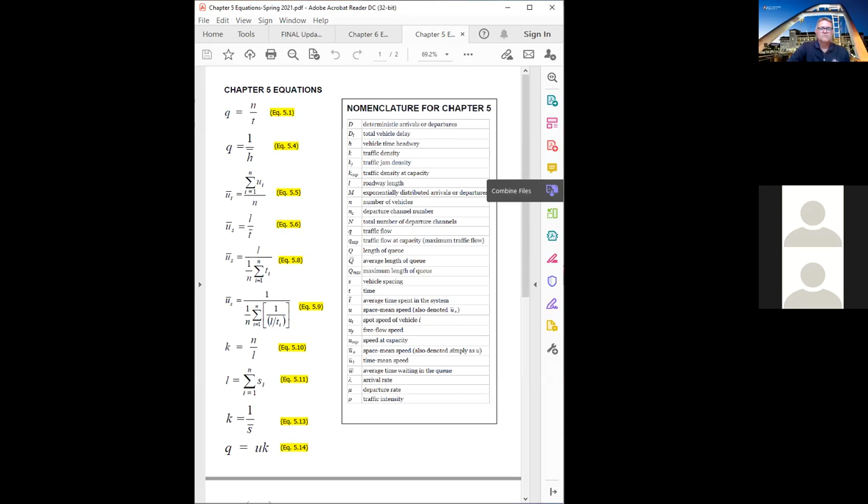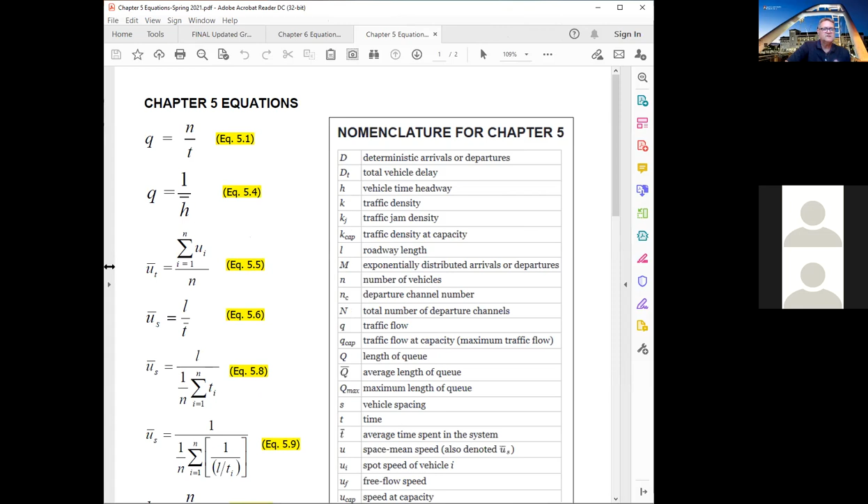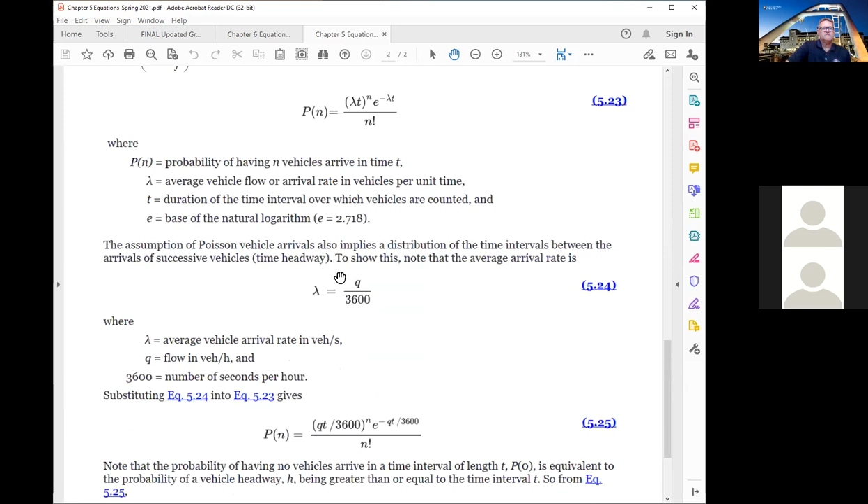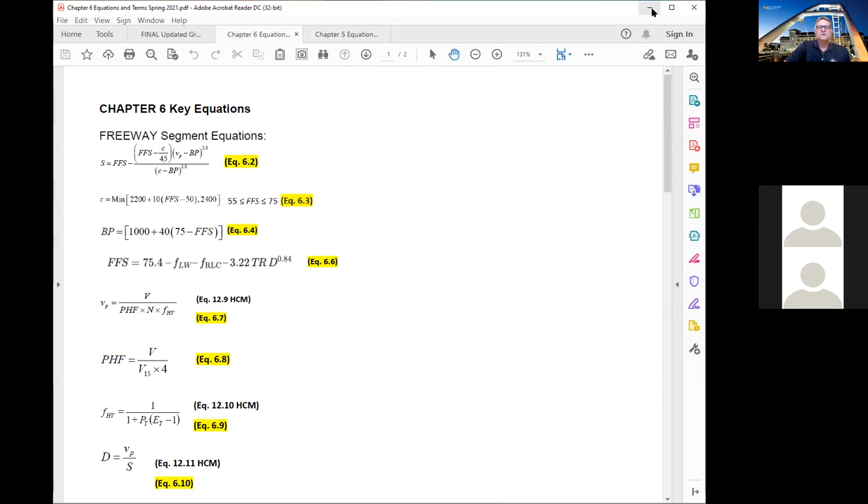You all should be seeing the PDF of the chapter 5 equations, and the nomenclature for chapter 5. I've been showing this as I've been going through chapter 5 there. It actually covers a couple of pages of information from chapter 5. Then I've also got the same thing for chapter 6, the key equations and the nomenclature. I just wanted you all to know that these pages will be provided with the midterm exam as attachments, so you'll have those available. Just wanted to make sure you knew that.

So now I'll go back to the slides. There we go. Okay. So going back to starting with chapter 5, obviously, I don't work backwards. I'll start with chapter 5.

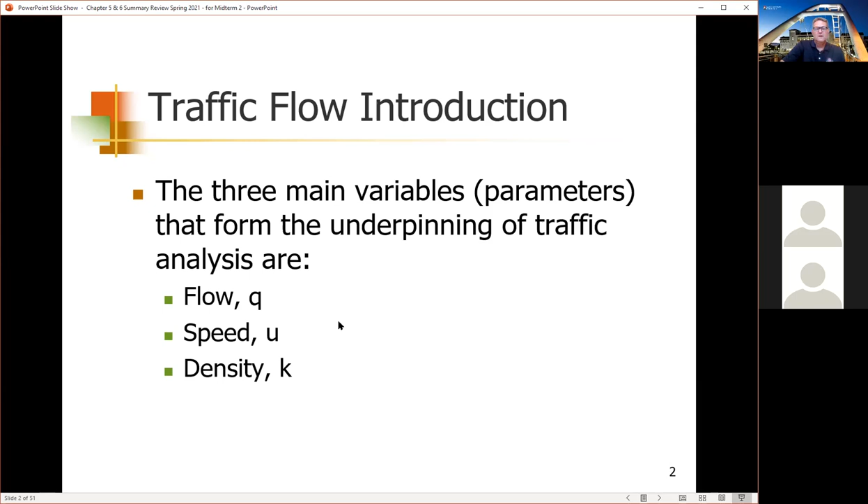If you recall, chapter 5 was quite a bit about these three variables or parameters: Q, U, and K, flow, speed, and density. Those terms and variables are important to understand the concepts in chapter 5. To get into some of the definitions, flow is defined as the number of vehicles passing a designated road point during a given time interval. So that's typically vehicles per hour, a very typical way to define traffic flow.

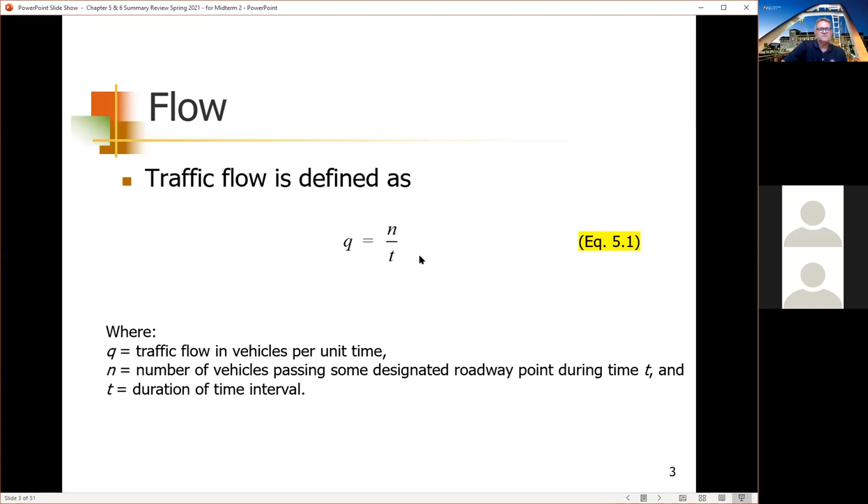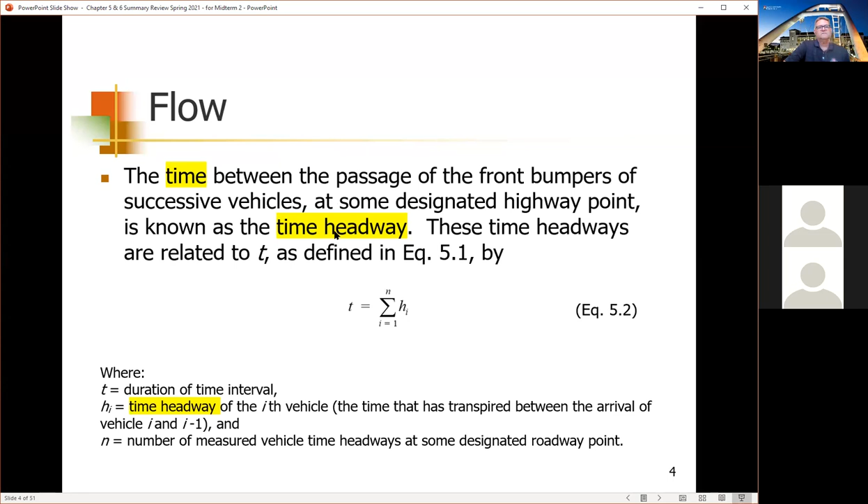And then I put in this slide, not so much for the flow, but just to remind everyone the concept of headway. Headway is a concept of time, not distance - spacing is the measure of distance. That's why I have it highlighted here, that headway is sometimes even referred to as time headway, just to emphasize the fact that headway refers to a measure of time.

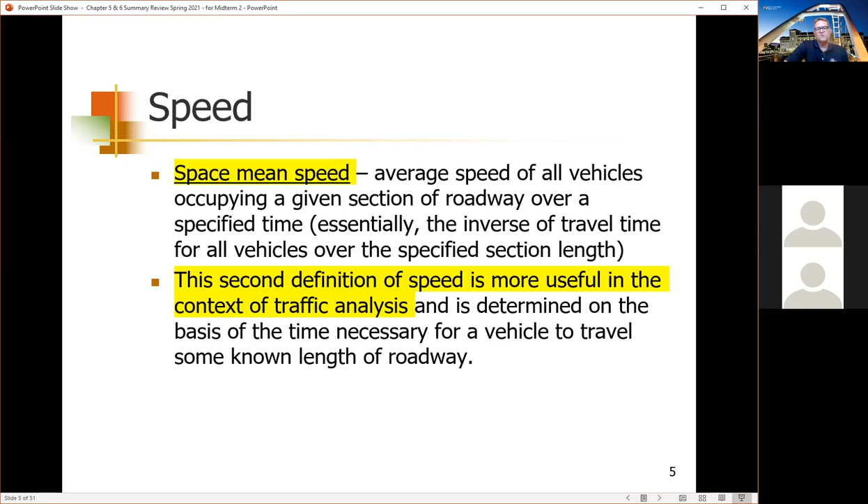So I just want you to be sure that you understand the difference between spacing and headway, because I think sometimes people think - at least in my mind, when I hear the word headway, I kind of think of it as a distance as opposed to a time headway. So, for me anyway.

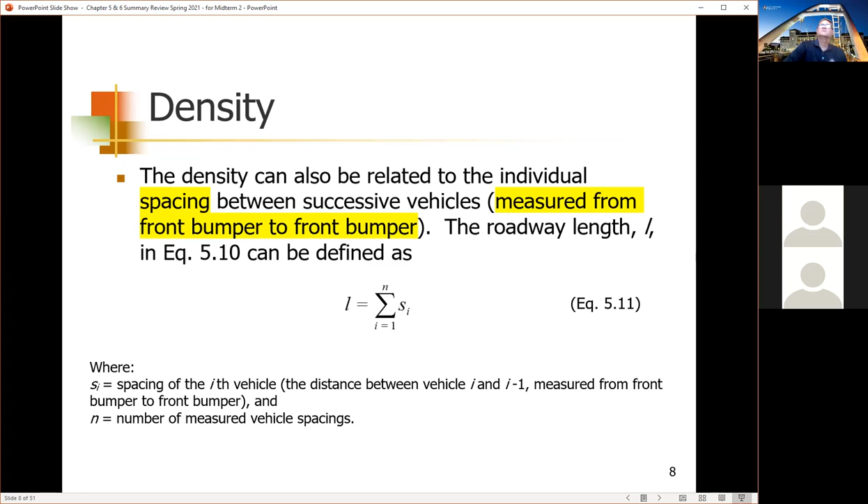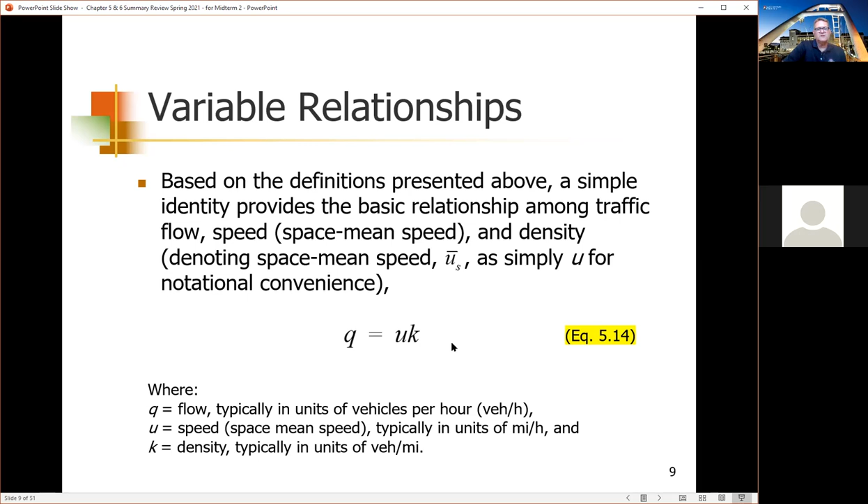This relationship here will be on the list of equations attached to your exam, but I think it's important to understand that flow Q is equal to speed multiplied by density. The units are vehicles per hour for flow, miles per hour for speed, and vehicles per mile for density. So you keep all these units consistent. This is one of the most basic relationships that we went over in chapter 5, and as you can see, we've got flow, speed, and density in the relationship.

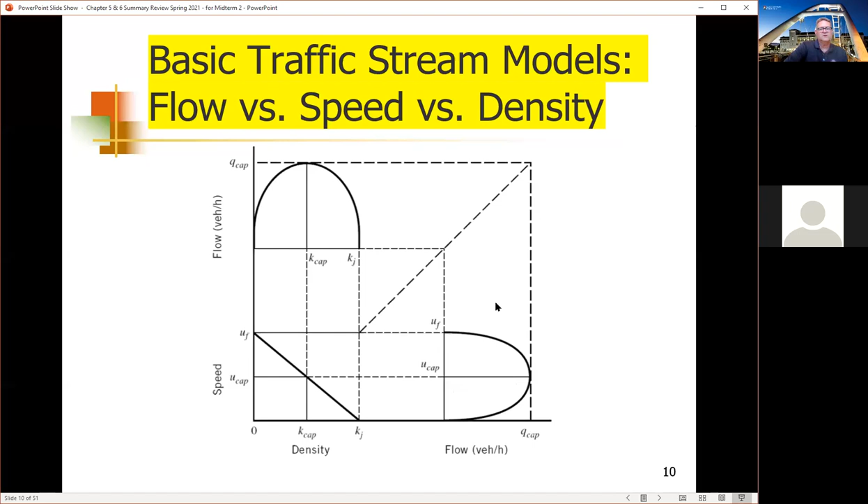I highlighted this figure so that you understand it shows the relationship between speed and density, which is linear down here, the relationship between flow and density up here, which is curvilinear, and the relationship between speed and flow over here. So the relationships that flow has with speed and density are both curvilinear, whereas the relationship between speed and density is linear. I think it's important to understand and be familiar with the relationships shown in this graph.

So then in chapter 5, we moved on to distribution as it applies to - there were some examples we went over that are non-traffic examples, but we wanted to emphasize the distribution of arrivals and departures of vehicles as being important to understanding traffic analysis. One of the variable distribution relationships that we used was the Poisson distribution.

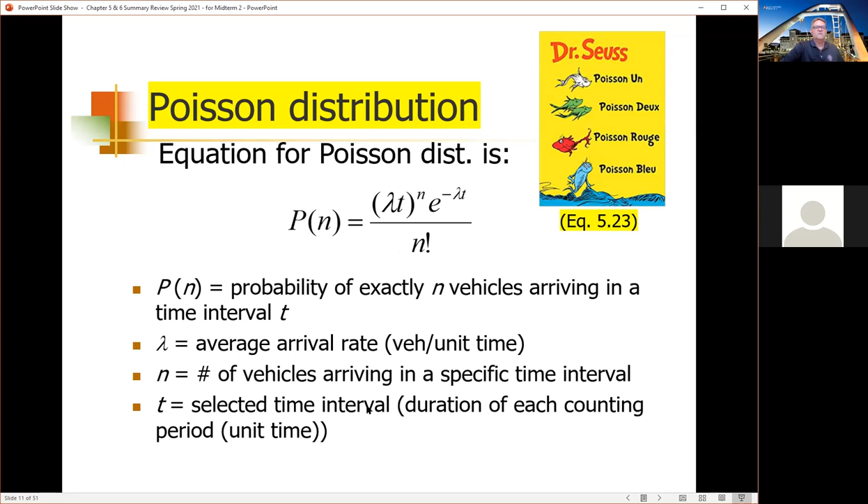Again, the equation will be attached to the exam to the extent that you may use it to solve a problem, but it's important for you to understand that Poisson distribution is a way to predict a random distribution of vehicles, in our case. Then we also went over a concept called the negative exponential.

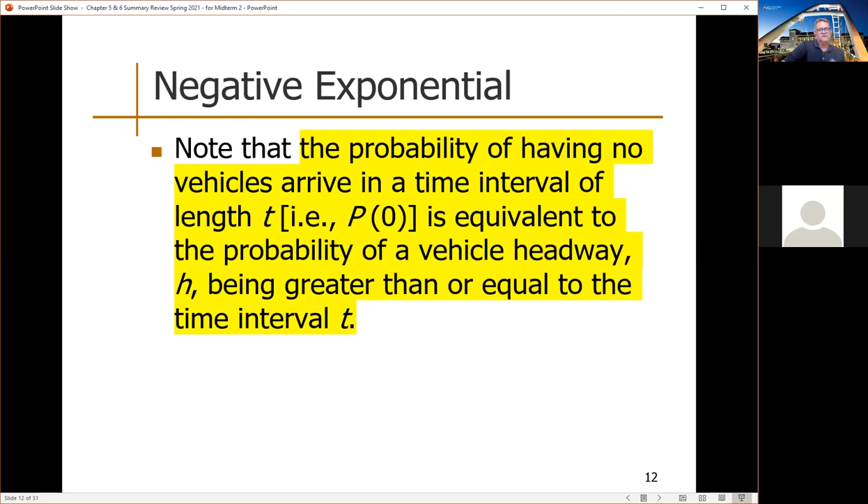I know we had homework problems on both the Poisson distribution and negative exponential. I think it's important to understand that the negative exponential is kind of a specific case where you're predicting the probability of having no vehicles arrive in a time interval t, which means it's the same as the probability of the headway being greater than or equal to that particular time interval. So it's a useful tool in being able to calculate various probabilities, as we did in the problems we worked on.

So I think that's a concept that's worth paying attention to and taking a look at, and look at the problems that we worked both in class and in your homework on that. Then there's the queuing model components.

Those include the arrival pattern, the service and/or departure pattern, the number of departure channels, and the queue discipline. The queue discipline refers to first in first out, last in first out, that kind of thing. The number of departure channels obviously just means, if you only have one departure channel...

You're likely to be restricted, and queues may very well form unless the arrival pattern is so infrequent that one departure channel works. Sometimes that does, but sometimes it doesn't.

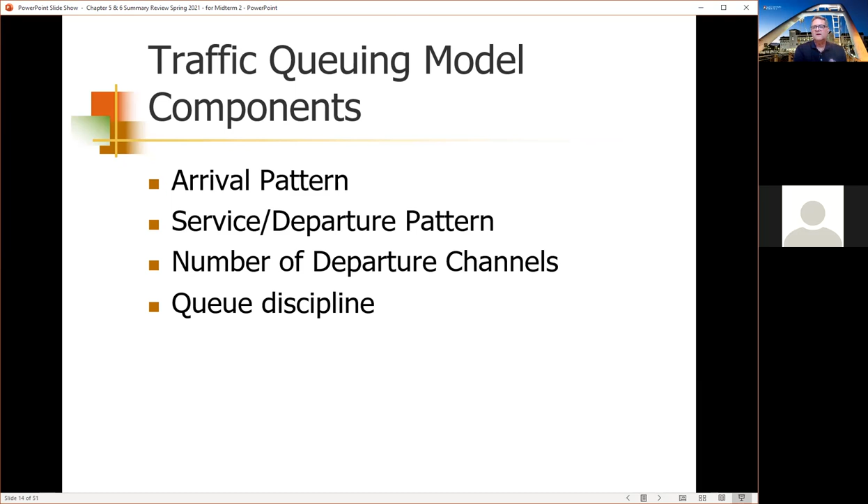Recall, we did some problems where we had a situation where there was arrivals, there was like a bottleneck, right, where departures were restricted and yet arrivals kept coming, that kind of thing. And so that's where this comes from here.

For both arrivals and departures with one departure channel. We did do a little bit in some of the exponential or stochastic ones as well.

But if there's going to be a problem on the exam in this queuing area, it's going to be a D-D-1 type problem, which is very similar to the example problem we did in class, 5.7. Can't remember the number of the homework problem, but I think there was a homework problem that was pretty much in line with these queuing problems.

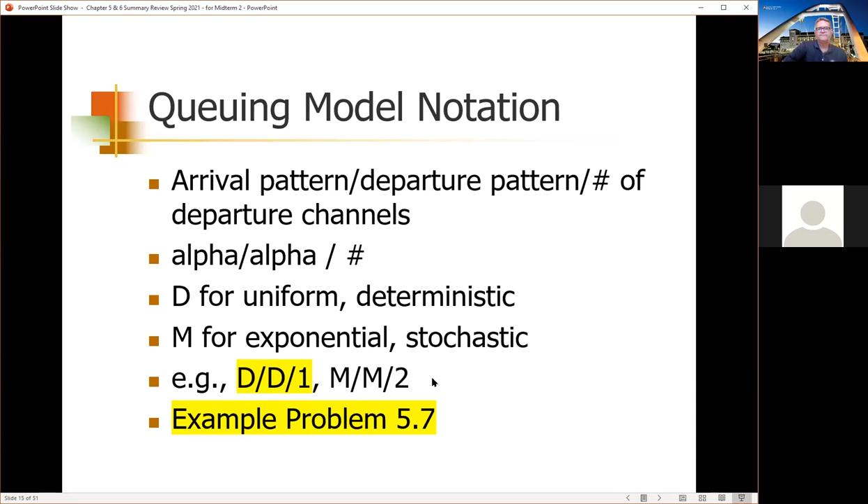Yeah, here's the example. This is example 5.7 from your book. I'm not going to go through the entire problem and calculation here, but just to remind you that this is a good one to review.

But basically, this is a typical kind of problem. Vehicles arrive at a recreational park. There's a single gate where everyone has to stop, and then the attendant distributes the brochure, which takes time for each vehicle. So the park opens at 8, at which time vehicles begin to arrive, and they give you the rate.

Which in this case, this is a deterministic rate. They're saying it's 480 vehicles per hour. After 20 minutes, the arrival flow rate declines to 120, and then it continues at that level for the remainder of the day.

So they're obviously making a very generalized assumption here that you're going to have this arrival rate of 120 vehicles per hour go all day long. It probably doesn't, but that's a good approximation, and maybe they have a pretty steady flow of vehicles, so it's okay to use a deterministic arrival rate.

But the issue here is that you get a big slug of folks that line up right when the park's going to open, trying to get in early, and they still have to go through that same kind of knothole. And so then they tell you that it takes 15 seconds to distribute the thing.

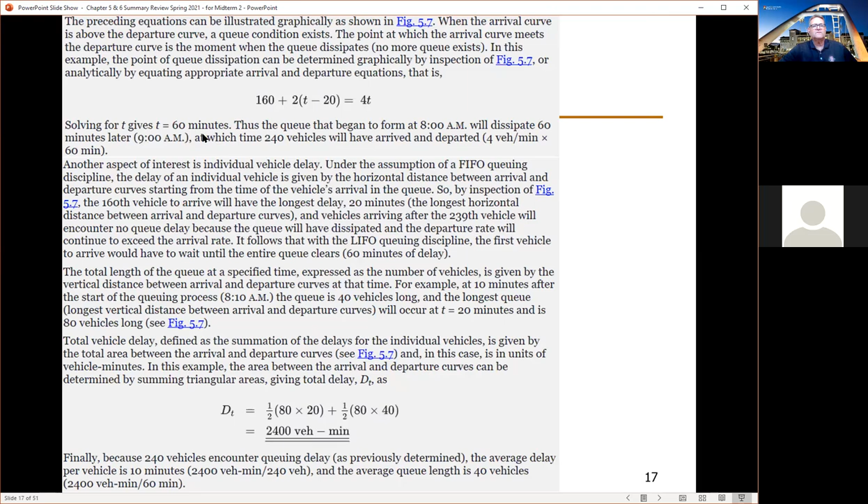You could do it graphically and determine that it takes 60 minutes for the queue to dissipate, or you can solve it by setting the arrival rate equal to the departure rate and solving for t, giving you t equals 60 minutes. So hopefully that helps you understand how you start at the starting point, figure out how many vehicles arrive in a certain period of time, get your two points since it's linear, and connect them — doing that for both arrivals and departures.

We've had some problems where there's a delay of, say, 15 minutes before vehicles are let in. That means arrivals start right at 0 and start going up, but departures don't start until 15 minutes — it's still 0, and then you put the line in, just as an example.

Okay, any other questions on those queuing problems? As I said, we did do a couple of problems with curvilinear functions associated with them, and did some mild calculus to calculate the area between the arrival and departure curves. But on the exam, I'm not going to go there. I think if there's a problem like this on the exam, it's going to be more linear, like these ones — deterministic and linear.

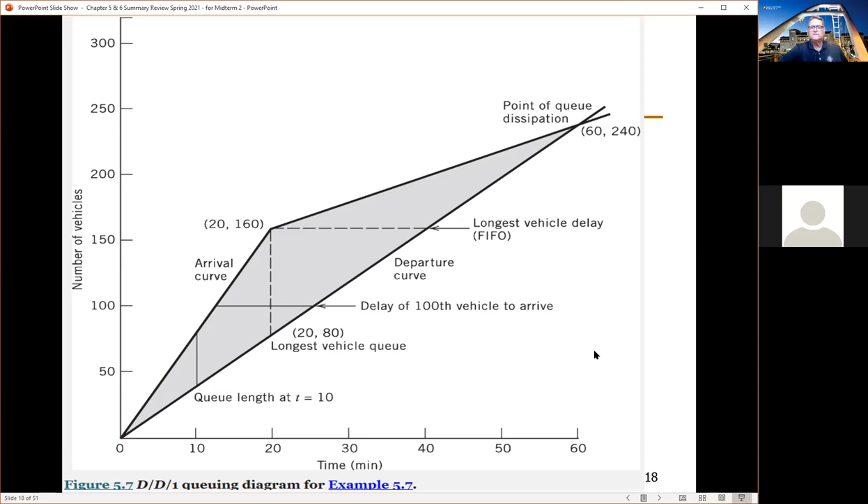So I'm headed to chapter 6. I think chapter 6 is a pretty important chapter. I mentioned this before, it goes right to the basics of traffic analysis in terms of the capacity that freeways and highways have. There's a few concepts on this introduction slide that I think are important to remember or keep in mind for the exam next week.

A freeway is a divided highway with full control of access. Access control means that nobody can cut a driveway directly into the freeway in order to get in and out. You can't demand that a driveway be put right onto a freeway that goes right into their line for food. They can't do that, but they can on a local street. How would you get into the In-N-Out if you didn't have a driveway access off of a local city street? But you can't do that on a freeway.

It's access controlled. So freeways theoretically provide uninterrupted flow, if they're not overly congested, there's not a major accident or that sort of thing. Generally, freeways provide uninterrupted flow. There's no stop signs, there's no signals to stop traffic. Traffic is only stopped in unusual circumstances, or I guess some people might say if a road gets congested at a certain time every single day, that's not really unusual. I get that, but that's why I say it's theoretically uninterrupted flow there.

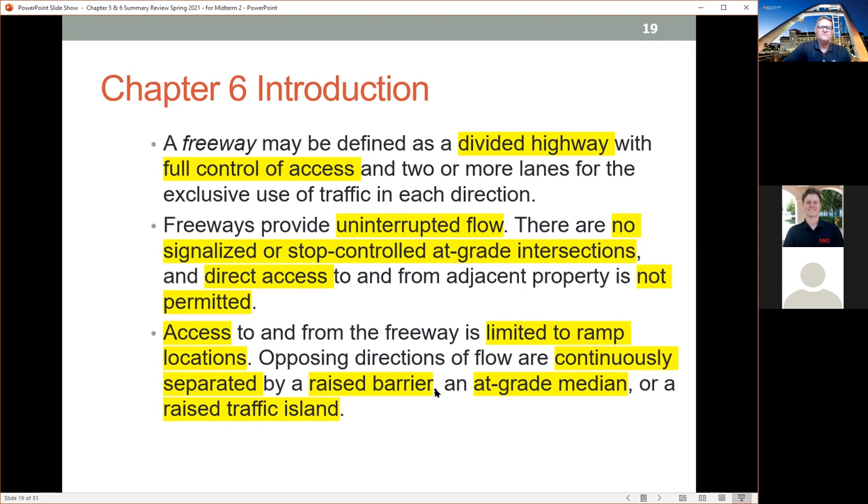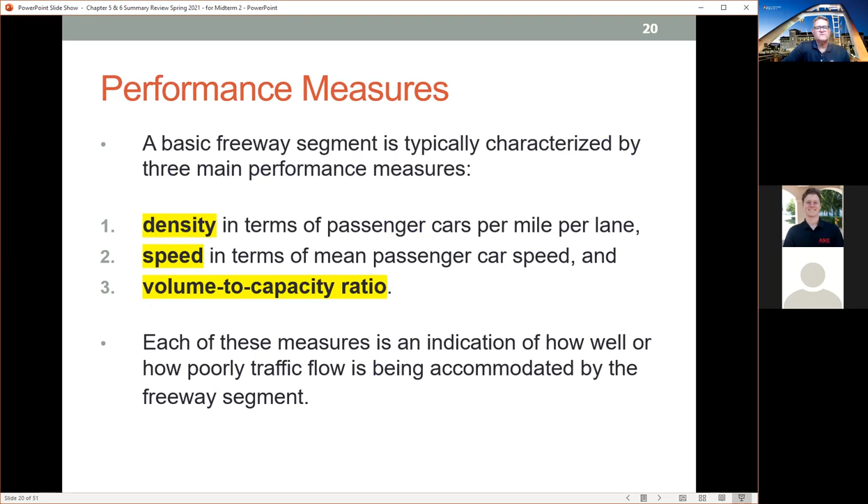Okay, and the performance measures - these are important for chapter 6 - the freeway segments' performance is defined by 3 things: density, speed, and the volume to capacity ratio. We didn't spend a whole lot of time calculating the volume to capacity ratio, but that's kind of what, in a sense, level of service is. But density and speed we focused a lot on in our problems. Anyway, these are things that measure or give an indication of how well or how poorly traffic flow is accommodated on a freeway segment.

So this is in section 6.2, the concept of level of service. Density is the performance measure used to define level of service, and you can see a density of less than or equal to 11 passenger cars per mile per lane is level of service A, which is basically free flow. But if your density exceeds 45 passenger cars per mile per lane, that's level of service F, and that's where you're basically in stop and go congested.

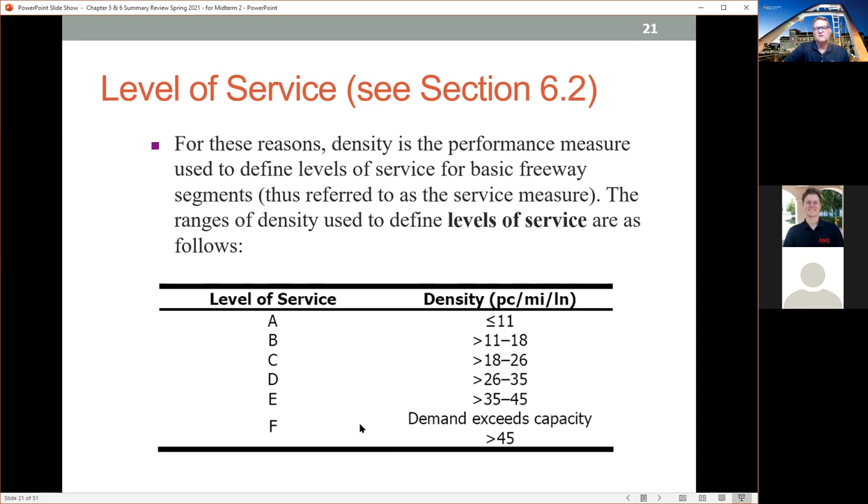Into the congested range. I highlighted this just so you understand that level of service A is free flow. Level of service B is basically free flow, but just a few more cars. Level of service C, again, very high performance generally, but level of service D starts getting - there's enough vehicles that maybe some drivers might slow down a little bit and might feel a little bit cramped. Level of service E is definitely on the edge - it doesn't take much for level of service E to break down into level of service F, which is stop and go, because somebody drops a paper bag out of the window and somebody hits their brakes, and it has a chain reaction. So level of service E is kind of on the edge, level of service F is stop and go, and level of service A is free flow, with B, C, and D being various levels in between.

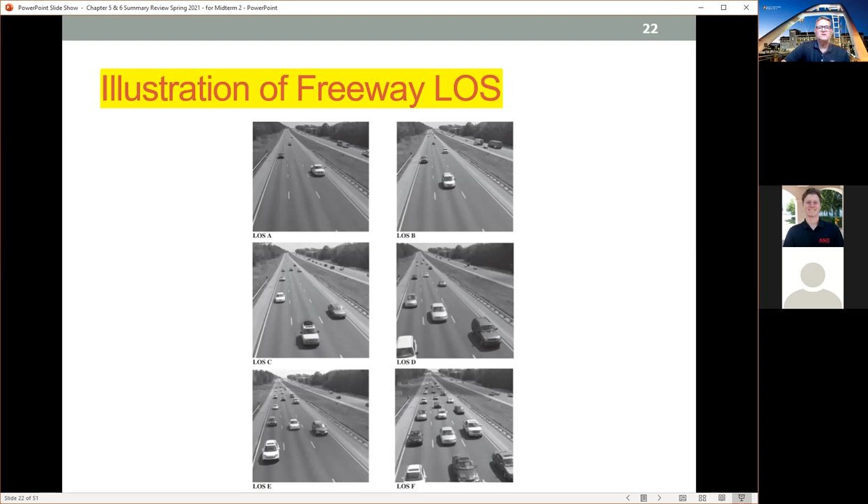So that leads us to the key equations that we used in order to define the speed and flow relationships for freeways. Remember, we're talking about freeways first, then we'll switch to multi-lane highways, and we'll do a really short amount on 2-lane highways.

Basically the speed equals the free flow speed in the density calculation if your flow rate is less than or equal to the break point. The break point refers to where these lines come out here and break off and go curvilinear.

And it changes on freeways. The lower the speed, the further out the break point is - you can see that here. Whereas for multi-lane highways, the break point is all at the same place, and we'll go over that when we get there.

But if you have a flow rate that is higher than the break point, but less than or equal to capacity - and you can't be over capacity, you can't have a flow rate over capacity - then you need to use equation 6.2. It's not a particularly complex equation, but it just takes a little time to make sure you get all the right values put in here.

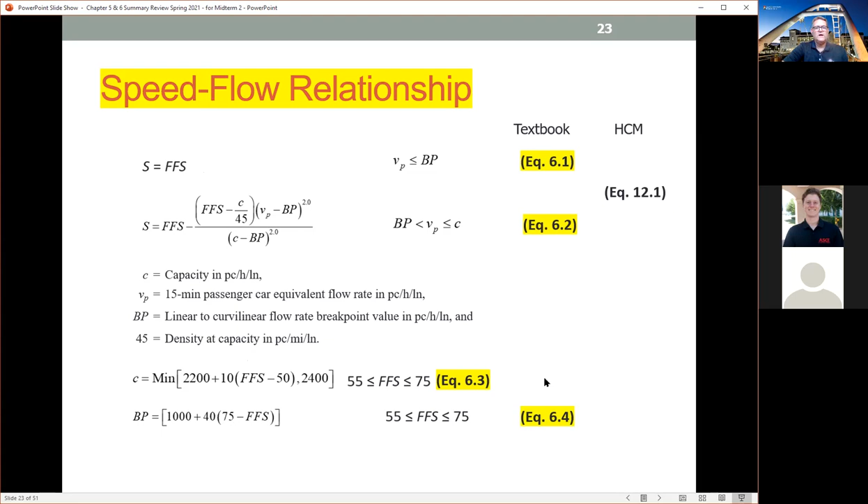And in order to solve equation 6.2, you actually need to use equations 6.3 and 6.4, because equation 6.3 is the capacity calculation that you need to use in a couple of spots, and 6.4 is the breakpoint equation that you need in a couple of spots. So if you're using equation 6.2, you need equations 6.3 and 6.4 as well in order to do it.

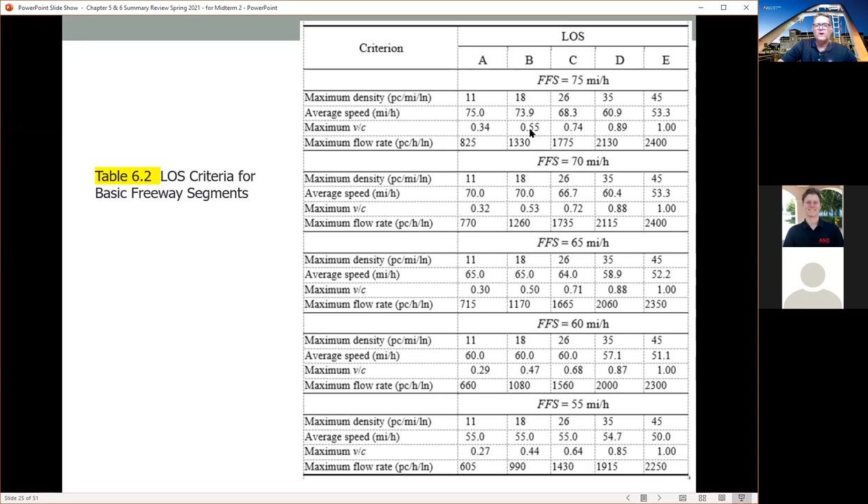For multi-lane highways, they don't have the same number because they're further back in the chapter. But all of that is here, and you can interpolate if you want to get really detailed using this table, or you can eyeball it using this figure if you wish - either is fine.

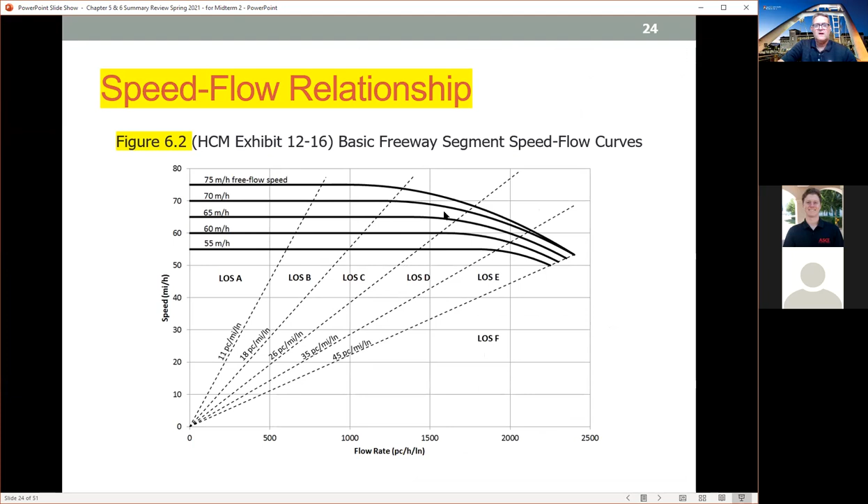So I wanted to just highlight the analysis procedure that we use for freeway segments. You will specify input data - that's basically lining up all your givens in the problem. And then you want to estimate or measure free flow speed, and you can use those equations that we just went over. You can estimate and adjust the capacity if that's what is suggested by the problem.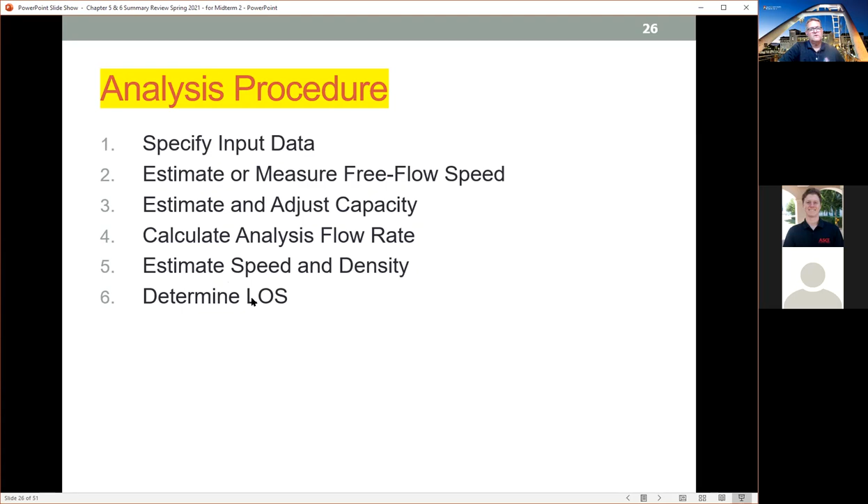The analysis flow rate, which is V sub P - if you get that, then you can estimate the speed. That might be the free flow speed; in some cases it is, in some cases it's not. You have to calculate the speed, and then you calculate the density, which is equation 6.10, which we haven't gotten to yet, but that's kind of the bottom line equation we're shooting for - basically the analysis flow rate divided by the speed. And once you know the density, you can very easily turn that into a level of service.

I wanted to remind everybody about the base conditions - in ideal circumstances on freeways, these are the base conditions you'd like to have in some cases. I guess I shouldn't say it that way because it assumes that there's only passenger cars. That's not ideal for the goods movement and freight community.

I don't think they like the fact that when trucks are restricted from driving on particular roads - they want their trucks to be able to drive on as many roads as possible because it's more efficient for them to get their goods where they need to go.

But in any event, the base conditions are 12-foot lanes. The right shoulder lateral clearance should be 6 feet. If it's more than 6 feet, it shouldn't have any impact on the flow on the right shoulder. Traffic stream is passenger cars only, because when you have trucks, they can have an impact on the flow of traffic.

So no on or off ramps within 3 miles upstream or downstream of a segment midpoint. Again, ramps can cause friction in the traffic stream, so base conditions wouldn't have any. Level terrain with grades no greater than 2%, because if you have steep or long grades, they can have an impact.

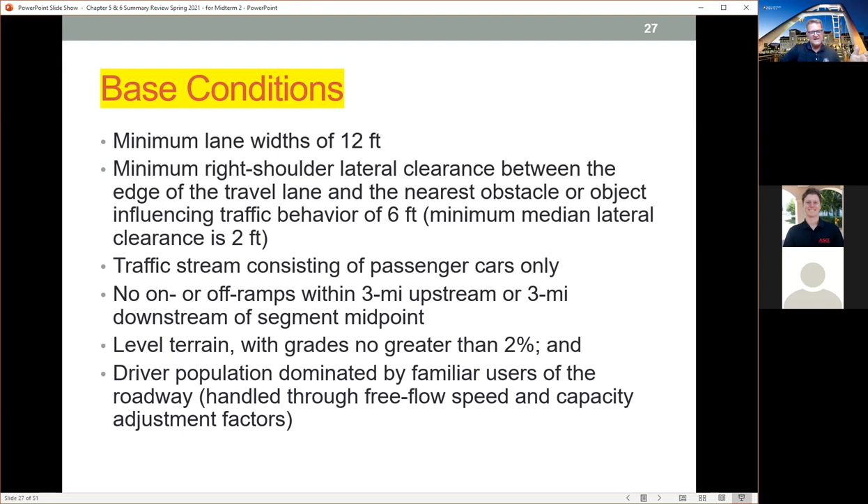So if you're going to estimate the free flow speed, if it's not given to you, you can use equation 6.6. For freeways, this is the freeway free flow speed equation. It basically takes the basic free flow speed of 75.4 miles per hour. Again, a lot of this stuff comes from thousands and thousands of observations over many, many years.

And then it's adjusted by an adjustment for lane widths — if you have something less than 12 feet — by the right shoulder lateral clearance if you have something less than 6 feet, and it's also modified by something called the total ramp density, which is a measure of how many ramps there are upstream and downstream, 3 miles upstream and 3 miles downstream from the midpoint of the freeway segment.

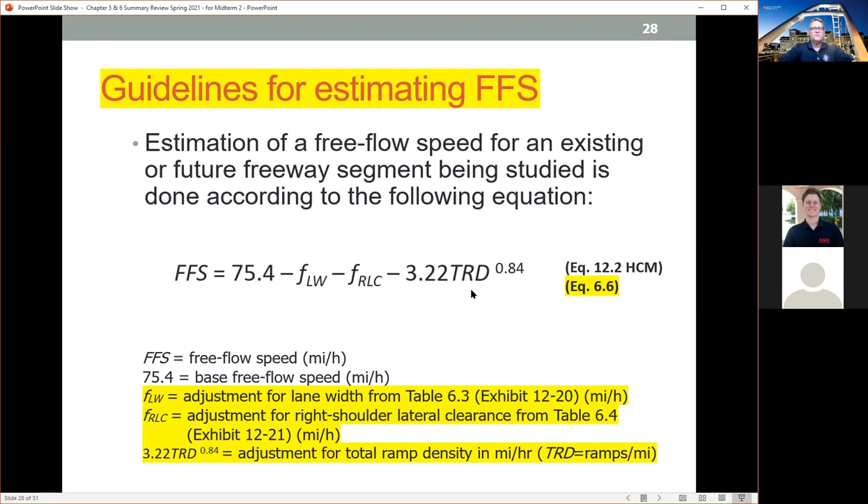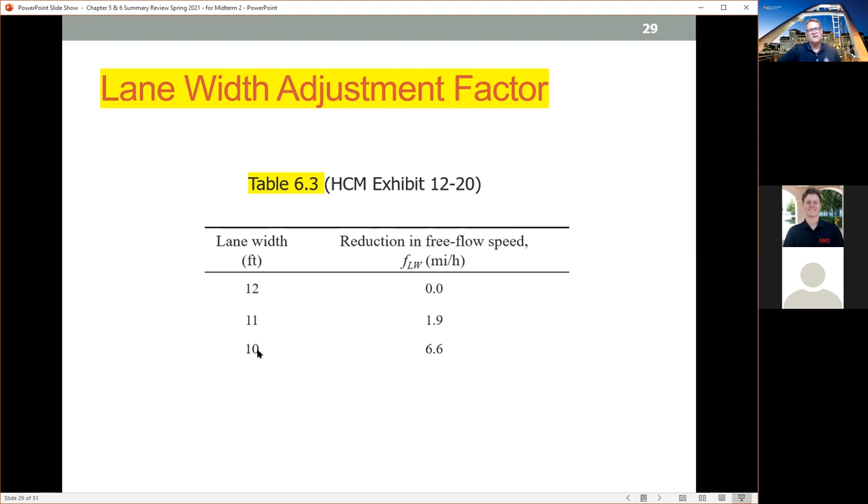So the lane width adjustment — you can see if your lanes are 12 feet, there's no adjustment. But if they're 11, it's 1.9. If they're 10, it's an adjustment of 6.6. And if they're 9, 8, 7, or 6, they don't exist, or they shouldn't exist. You shouldn't have a 9-foot lane. Maybe on a city street in a downtown area where traffic is going very, very slow, but it's pretty rare to see a lane width of less than 10 feet anywhere.

Lateral clearance — you can see the adjustment factors here. It depends on the number of lanes in one direction, and you have adjustment factors if your right shoulder lateral clearance is less than 6 feet. If it's over 6 feet, there's no adjustment.

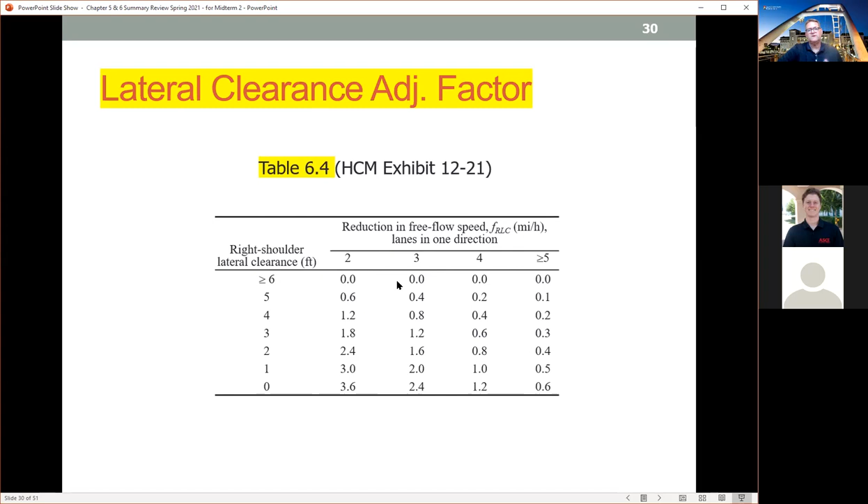And then the total ramp density — again, you take the number of ramps 3 miles upstream plus 3 miles downstream, and divide that by 6 miles to get a number of ramps per mile. So if there's 3 upstream and 3 downstream, that's 6 divided by 6 miles, which is 1. If there's 6 ramps upstream and 6 ramps downstream, that's 12 divided by 6, which is 2. So that's basically how that works.

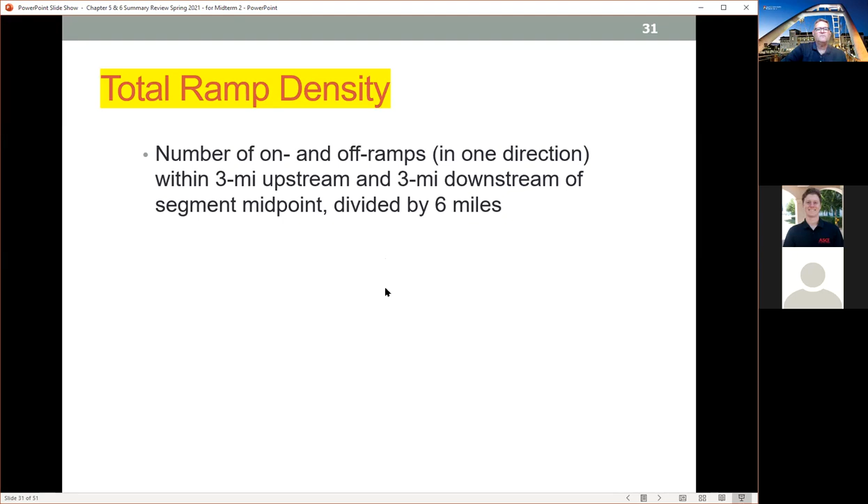And then this equation is very important — we used it a lot in solving the problems. Equation 6.7, which is the relationship between the flow rate and the hourly volume, also takes into account the peak hour factor, number of lanes, and heavy vehicles should they exist. As a matter of fact, I think we had one problem I just got a question about today, where the problem said it's passenger vehicles only, which is very unusual.

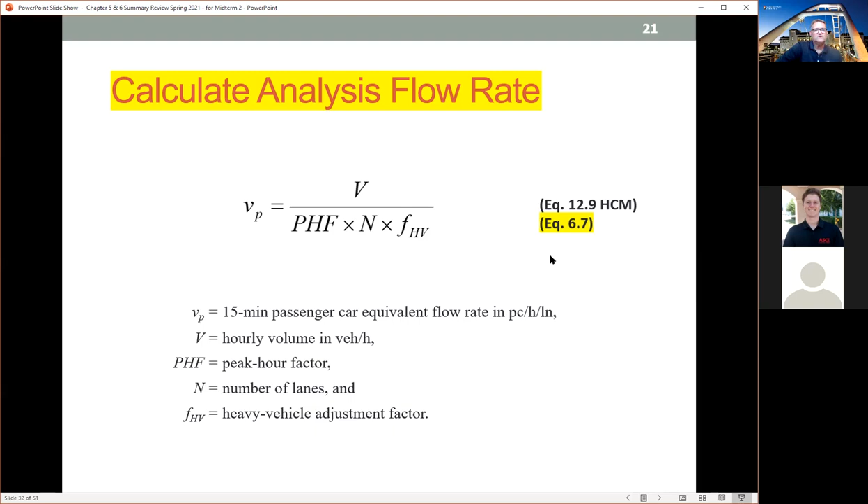As I said before, honestly, the freight industry doesn't like to see trucks restricted from roads, but it happens. And when they do, this adjustment factor turns into 1 because there are no heavy vehicles. You can, when you do the math for it — there's another equation coming up here you can see. So in any event, this is a very important equation. You're almost certain to be using this on the exam Tuesday.

The peak hour factor: sometimes the problem gives you the information so that you can calculate the peak hour factor, which basically is the hourly volume divided by the maximum 15-minute count within that hour, times 4. So it's a measure of how concentrated the traffic is within the hour.

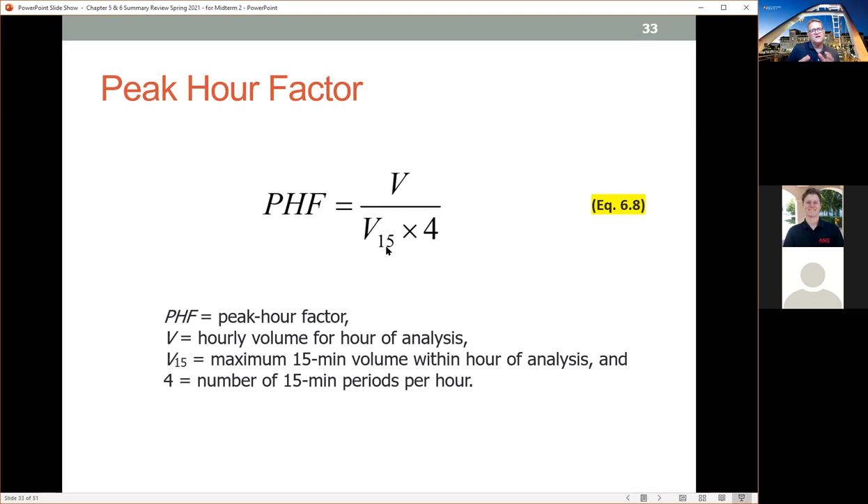And then you've got your passenger car equivalency, or PCE factor. This is where you account for trucks, buses, and RVs, large vehicles. And this is where grade conditions can come into play. Both the steepness of the grade and the length of the grade can have an impact on it. So there are 2 ways to deal with this.

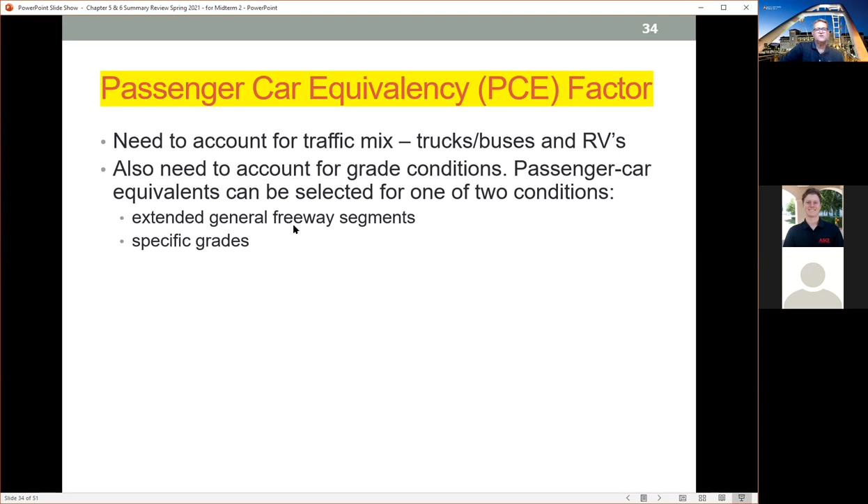You can have extended general freeway segments or specific grades, and we'll go over both here. It's important for you to understand both, or to be familiar with both. Extended general freeway segments are where you don't have a sustained, relatively steep grade, so you can characterize the area you're analyzing more generally.

If you're in level terrain, that's any combination of grades that permits heavy vehicles to maintain the same speed as passenger cars. In other words, you're analyzing a segment where the trucks don't have any trouble keeping up with the passenger vehicles. It also generally includes short grades of no more than 2%.

Rolling terrain, on the other hand, is a combination of grades and vertical alignment where heavy vehicles do reduce their speeds below those of passenger cars, but it doesn't cause heavy vehicles to operate at crawl speeds for any significant length of time or frequent intervals. So there's a relatively small impact on the flow, but not so much that you need to look at the specific grades themselves — that would be rolling terrain.

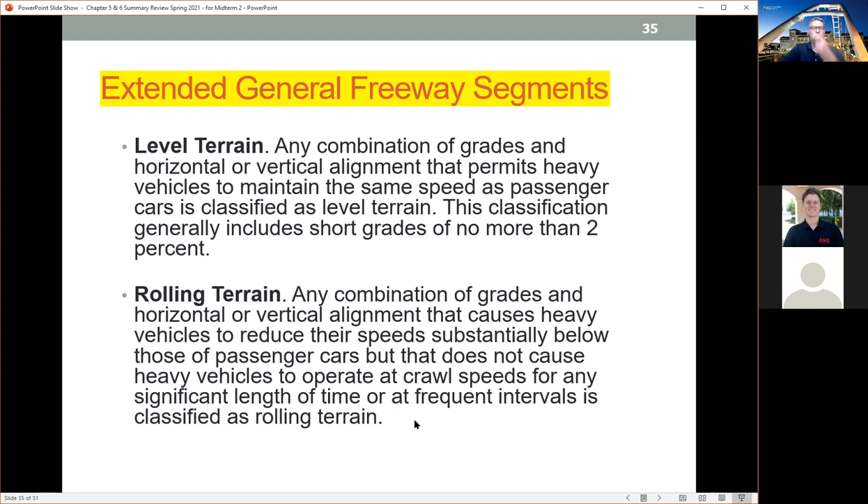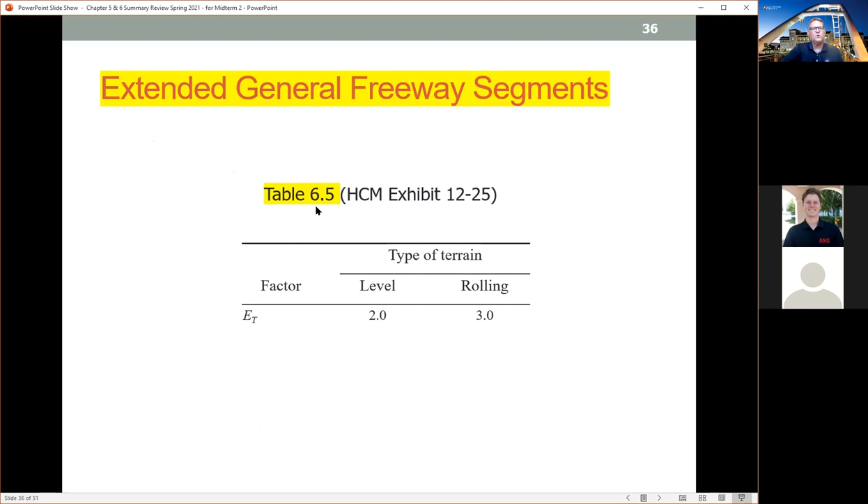There's still a factor for both level and rolling terrain to acknowledge that there are trucks on the road and they are going to have some impact. If you do have an extended general freeway segment, the problem will say that it's in level terrain or rolling terrain. If you see those words, level or rolling, you know table 6.5 is what you need to use.

On the other hand, when the analysis segment consists of terrain that can't be considered an extended general segment, then tables 6.6, 6.7, and 6.8 are used to get your PCE values for specific upgrades or downgrades.

Now, one thing I'd tell you is we didn't do any problems with downgrades. It's interesting — if you look at these tables, there's one line that says for a grade of 0 or less than 0, in other words downgrades, which really don't have much of an effect, but they do. Still, the fact that there are trucks on there, you can actually still get a value for a long sustained downgrade.

If you need to use one of these tables in the exam on Tuesday, it's going to be for an upgrade, because upgrades are the ones that really have more of an impact on flow. It just makes sense, right? Trucks going downhill aren't necessarily impeding the flow. They still have an effect because there are trucks — people drive differently when there's trucks on the road, that sort of thing. But it's not the same as if they're going up a sustained grade.

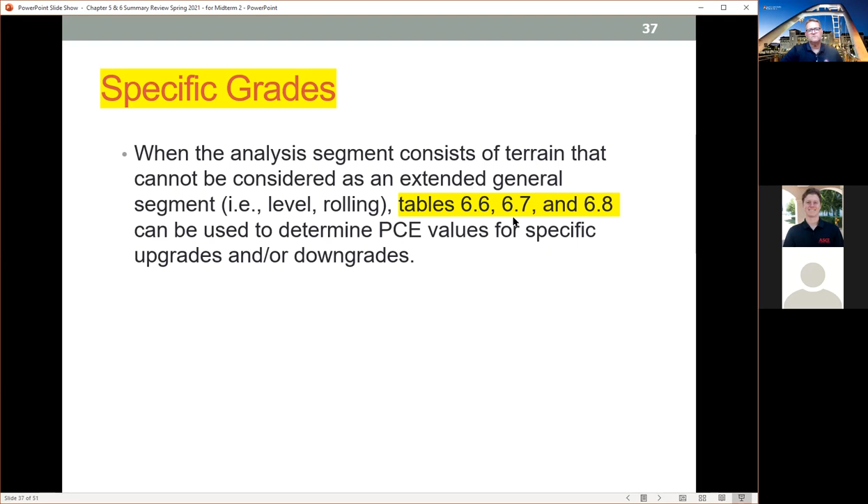So for example, if the problem has a 50-50 split between the trucks, I'm pretty sure that's table 6.7. That's the table that you'll be given as part of the exam.

Then there's the heavy vehicle factor, which is in that equation 6.9 we went over earlier. So this is the equation you're likely to use. Oftentimes you're given this proportion of heavy vehicles, or if not, you're given the number of passenger cars and trucks, like in one of the homework problems. They might have even separated the trucks into single unit and tractor trailers, so you have to add all those together to get your total volume. Then you take the number for the trucks and divide it by the total volume to get this proportion of heavy vehicles. Oftentimes it's given to you in the problem.

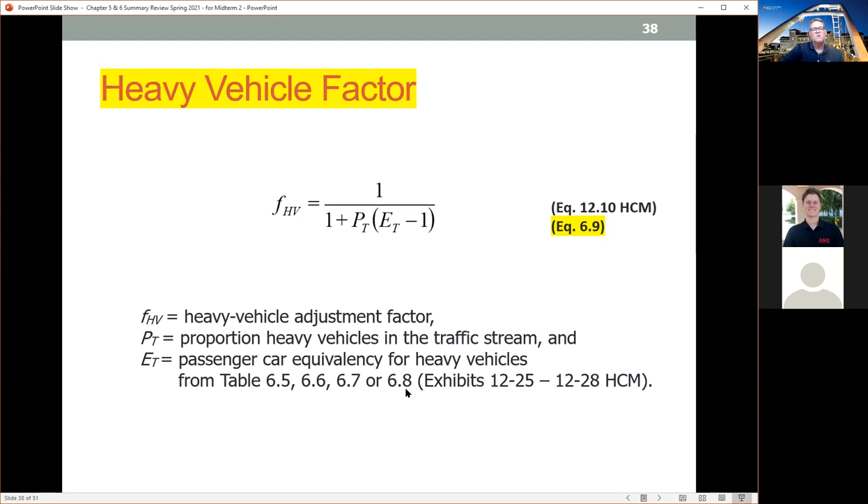And then E sub t, that's the thing you get from either rolling or level terrain from table 6.5, or if it's a specific grade you need to assess, you have to use table 6.6, 6.7, or 6.8 in order to put that in.

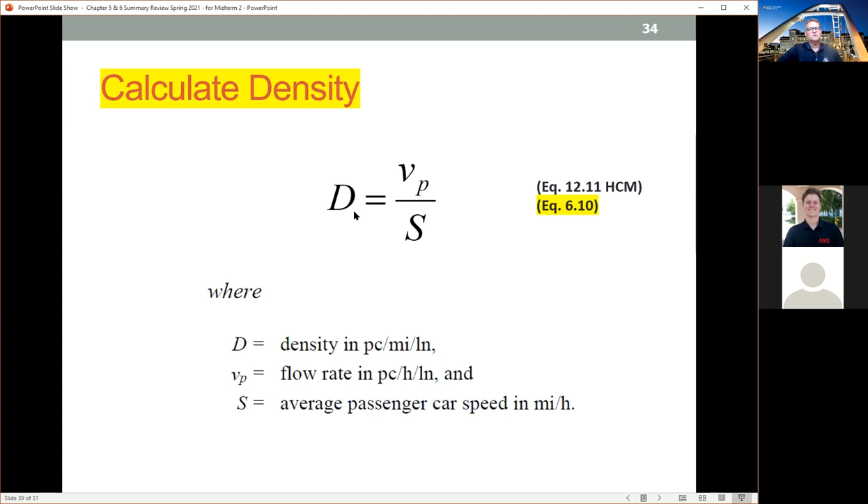And then ultimately, this is the equation we're aiming for, the density calculation, which is the flow rate divided by the speed. Remember, the speed could be the free flow speed in some cases, but if not, you need to go beyond the free flow speed, use those additional equations, and calculate the speed value so you can get an accurate density. Then you can use that density to determine the level of service for that particular freeway segment.

So I'm going to end the freeway portion by saying example problem 6.1 and example problem 6.2 are good problems to take a look at. The first one has general terrain, so you're using table 6.5, and example problem 6.2 has a specific grade you need to assess, so it uses one of those three other tables. I can't remember which one, but those are good problems for you to look at to help prepare yourself for next Tuesday.

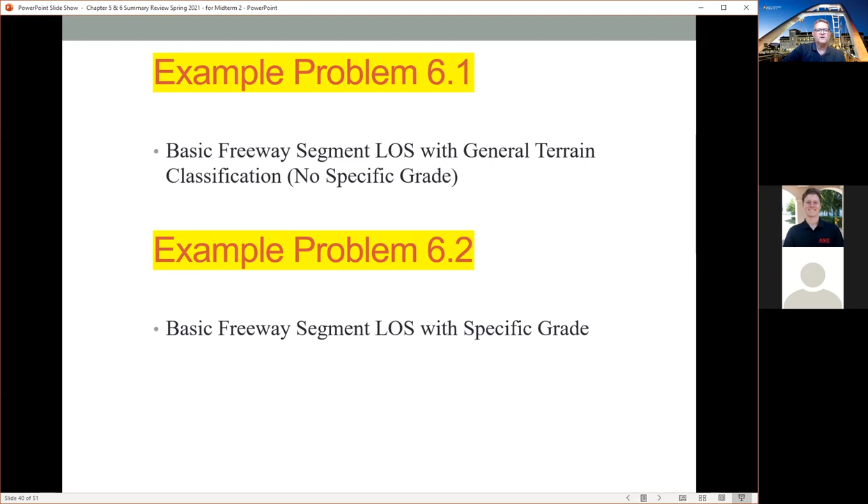So now I'm moving on to multi-lane highways. Any questions on the freeway portion before I move on?

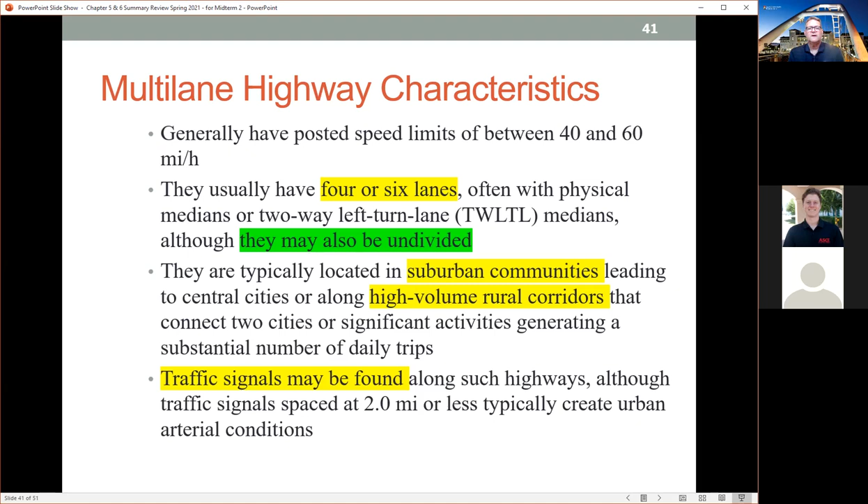So the equations for multi-lane highways, these equations look kind of familiar, right? It's the exact same equation except for how it's modified. The analysis flow rate here says for freeways, it's if this is less than or equal to the break point. Well, for multi-lane highways, the break point for all speeds is 1400.

In passenger cars per hour per lane, 1400 is the same for all. And when I show you the figure, you'll see that.

On the other hand, if your flow rate is higher than 1400, but less than or equal to the capacity, then you need to use equation 612 rather than equation 611, because you've got to figure out where the speed is on that curvilinear portion of the curves. And in order to do that, the only additional equation you need is equation 613.

This is in order to calculate the capacity, for anything between 45 miles per hour and 70, where the free flow speed is in between those two figures. You figure out the capacity and plug that into the equation, and you can solve for your speed, adjusting your free flow speed to solve for speed that way. And remember, for the freeways, you also had to calculate the break point. But here you don't need to, because there it is, 1400. It's already in the equation.

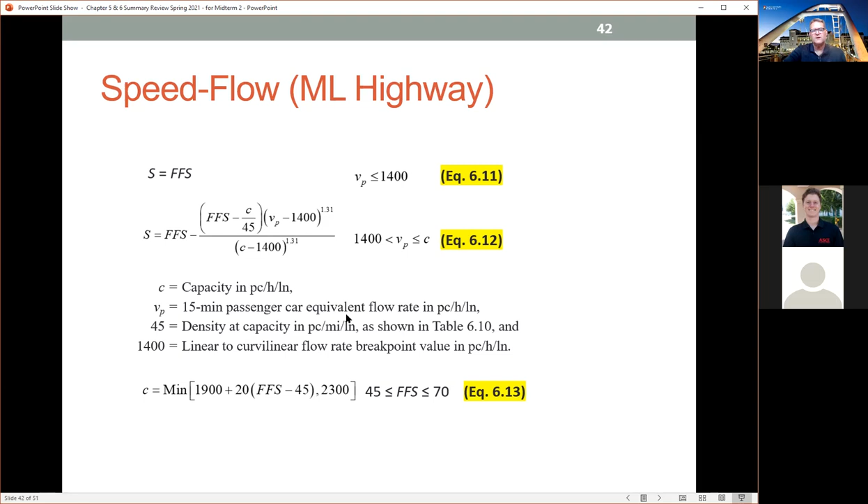So this is figure 6.4, which looks an awful lot like figure 6.2, but it's for multi-lane highways, and it's not the same. Here's the flow rate, 1200, 1600, so go right in the middle. And sure enough, that's right where the break point is all the way across. There's a break point at 1400 for all of these free flow speeds, 70 through 45.

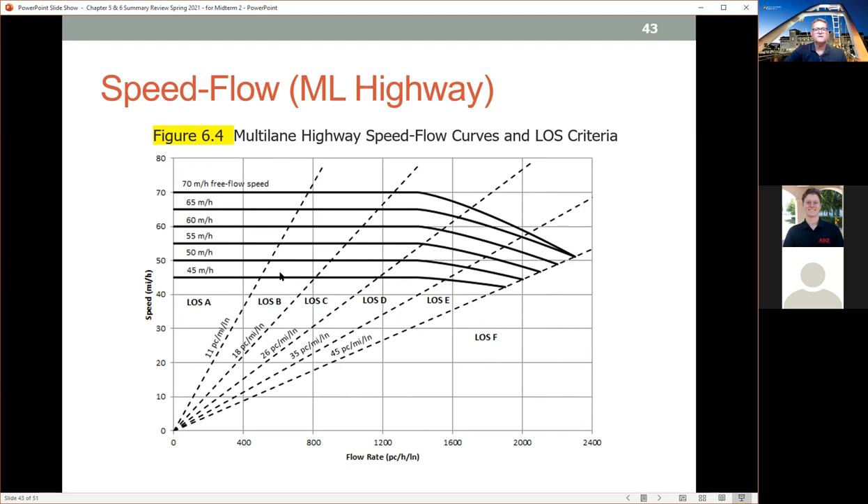Otherwise it's the same. You've got the speed here, the flow rate here, and then the density in these dashed lines with the levels of service in between the wedges of the pie, so to speak. There's also a table 610, that is, what you see in this figure is represented kind of in tabular form on this table. So you can use either one to help you solve various problems.

So now the free flow speed for multi-lane highways again looks kind of similar to the freeway equation, but when you look at it more closely, you see this factor here is exactly the same. You use the same table and everything, table 6.3, for the lane width adjustment.

There's no difference there, but the lateral clearance is different because you've got to look both to the left and to the right in order to come up with this factor. This factor is about the median type. It's a really simple table - you either have a median or you don't. If you don't have a median, you put in a factor. If you do have a median, your factor is 0, because if you have a median, you don't modify the flow.

And then there's an access point frequency. Here, this is a number of access points per mile. That's the final factor here.

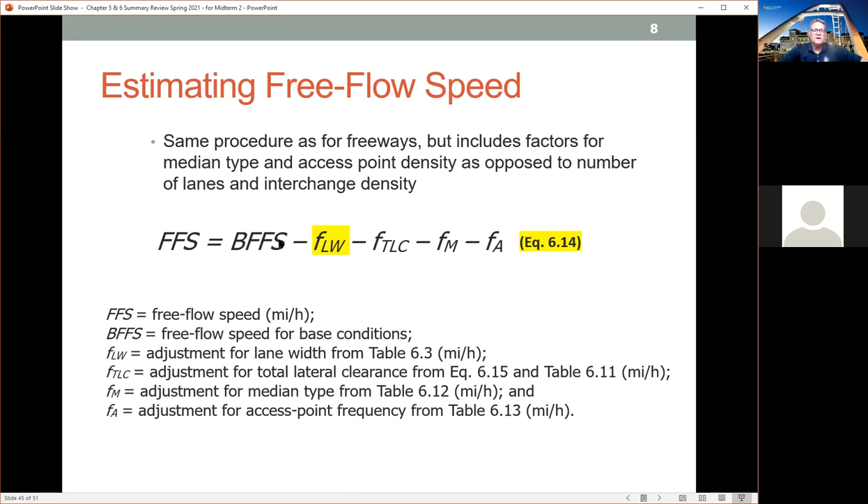The other thing I wanted to cover is this BFFS. Generally, this is defined in your book as 5 miles per hour over the posted speed limit. Sometimes problems will just tell you what it is. Sometimes they'll tell you the free flow speed or the posted speed limit, or they'll just say the speed limit, and the BFFS would be 5 miles per hour above that. So that's an important adjustment to be aware of.

I'm not going to show you the lane width adjustment because it's the same as the freeway. But for this total lateral clearance, there's this equation 615. You have to look at the lateral clearance on the right and the left. The total lateral clearance is the sum of lateral clearances of the median - if the median is greater than 6 feet, you use 6 feet - and the shoulder, if it's greater than 6 feet, you use 6 feet. Therefore, for the purposes of analysis, total lateral clearance cannot exceed 12 feet.

If you have 12 feet of lateral clearance, let's say 6 and 6, whether it's a 4-lane or 6-lane highway, it's still going to be 0. There was an example problem with a two-way left turn lane, which by definition is over 6 feet wide. So you use 6 for the two-way left turn lane, plus 4-foot lateral clearance on the right, giving you 10. It doesn't matter whether it's 4 or 6 lanes here, it's 0.4 either way. That 0.4 was the value used for the TLC factor.

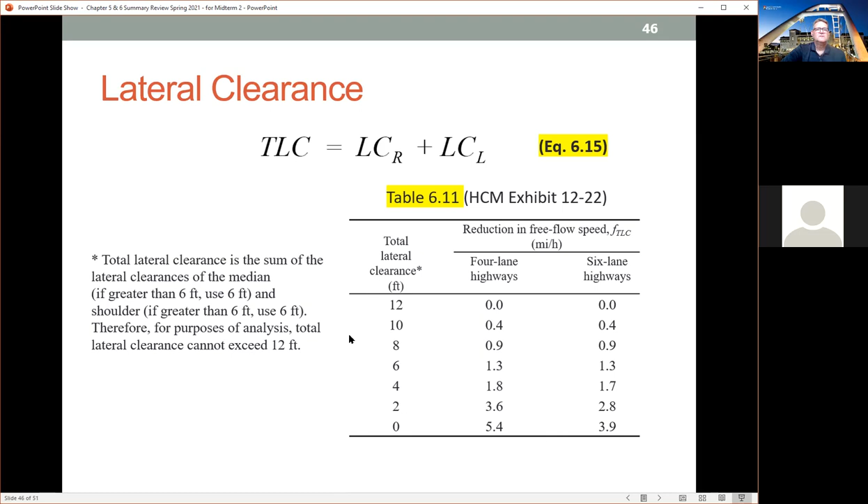Then we've got the easiest table in your entire book. If it's an undivided highway, the adjustment is 1.6. If it's divided, it's 0. Pretty simple.

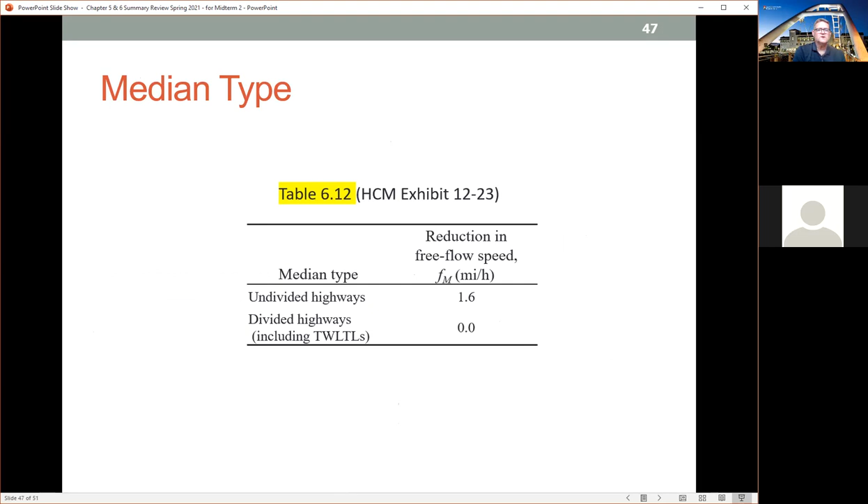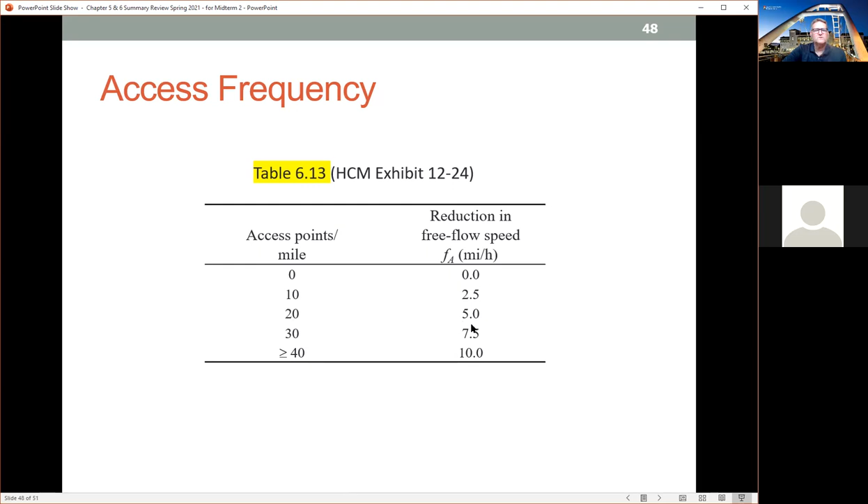Access frequency is the number of access points per mile. This is generally given to you - unless you have a map and have to count them yourself. They may tell you there are 50 access points spread over 2 miles, so you'd do the math to get 25 access points per mile. Then you interpolate in the table. If you end up with 25 access points per mile, it probably makes sense to use 6.25 as your reduction in free flow speed, just as an example.

So for multi-lane highways, how do you go about solving them? You calculate the analysis flow rate, same as for the basic freeway segment, using that same equation, 6.7, I believe. You use the heavy vehicle factor with the same formula and PCE tables as for freeways. You calculate the density the same way, analysis flow rate divided by speed, and you can determine the level of service using either table 6.10 or figure 6.4.

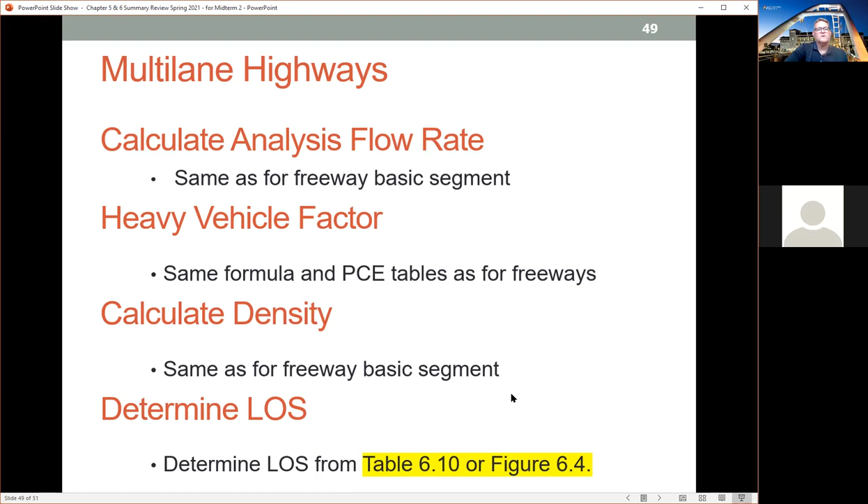Those are these, where are they? That and that, those two. So that was multi-lane highways. Let me stop there for a second and see if anybody has any questions about how they differ from freeways. I'd tell you, you're definitely going to see something on the exam for both a freeway and a multi-lane highway, so understanding the differences between them is a good thing to look at.

Okay, the final thing I have to go over here is just a couple of slides on two-lane highways. If there's anything on the exam about two-lane highways, it's going to be in that first true-false section, just so you understand some really basic concepts about it. Obviously, two-lane highways have one lane of travel in each direction and are typically undivided.

Anyway, they're generally used for lower traffic volume situations - obviously, there's only one lane in each direction. Interesting here, the free flow speed range they show is a little bit higher than multi-lane highways, because a lot of two-lane highways are out in more rural areas, connecting up different vicinities, and they generally have low traffic volume. So higher speeds - as long as you can provide the appropriate design parameters and features, you can safely drive these roads at higher speeds.

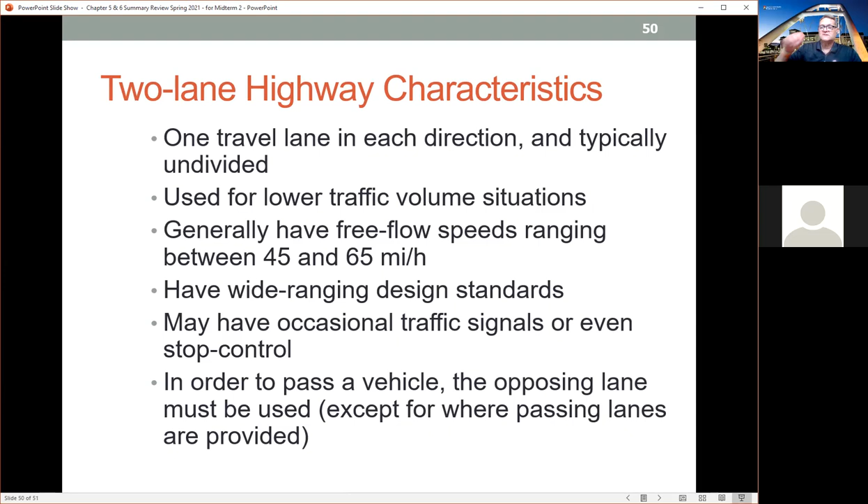And that's because of the passing. The thing is, terrain can have a significant effect on level of service, because if there are restrictions on passing sight distance, that means more and more vehicles are going to turn into a train of vehicles that are following. And if that situation persists for too long, people start taking chances to pass in areas where it's not appropriate to pass. So that's an important concept in two-lane highways.